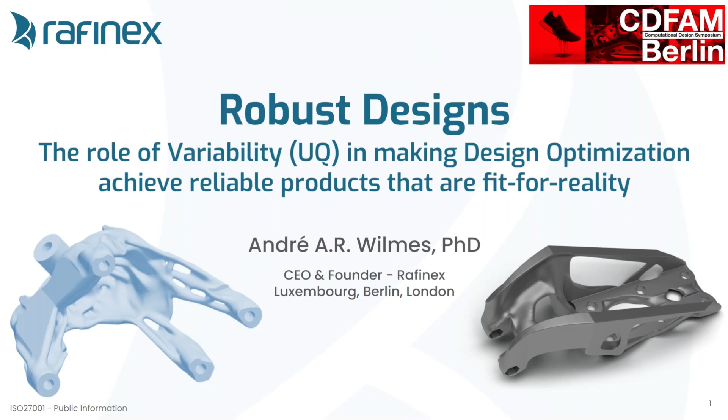This is going to be technology and ideas about robustness, safety, how to get computational designs in the air. Four sections about what I want to talk about. First, who we are. I think we know a fair amount of people in the room, but not everyone quite yet. So just quick words for where we come from. Then I want to touch on the role of risk and money, about computational design in industry, on the field, out there, up in space, and so forth.

A bit about the theory, or at least one take, how we go about it. And then I really want to move as far as possible forward to show past, current, and future design activities that we're involved in to help promote computational design, bring more vehicles into the industry to really be a trailblazer in that sense.

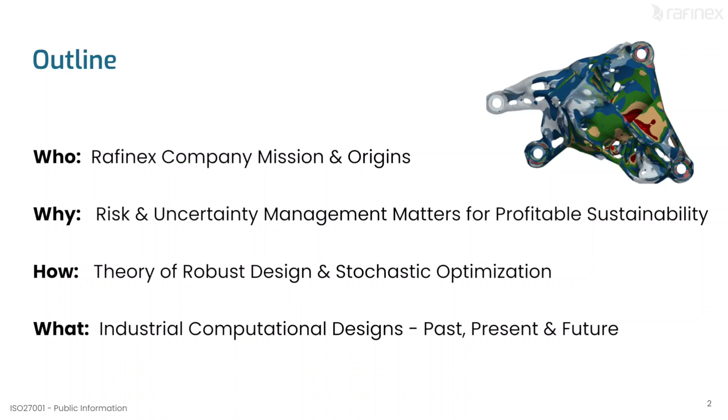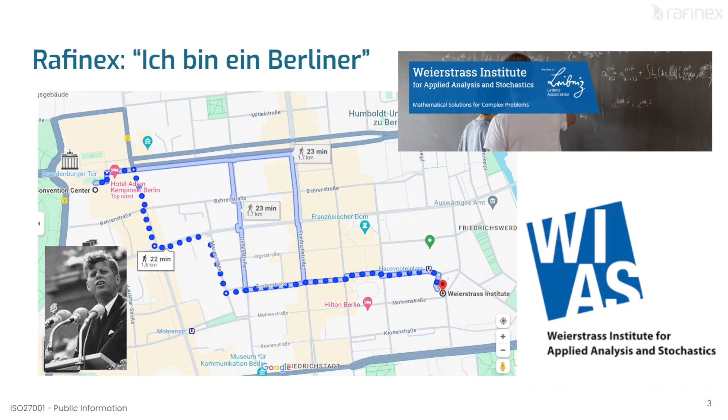So I put this together this morning. So Rafinex is actually a Berliner, so we are formally a spin out of down the road, the Weierstrass Institute for Applied Analysis and Stochastics. So yeah, I thought initially that it was a good historical reference, but then today's macro politics maybe brought us a little bit back to that situation as well.

So why does risk matter, really? We think that risk is integral when business decisions are being made, what designs are being produced. If you don't manage risk within the context of optimization, then you're never really going to have the trust of the business owners or the design owners to commit to optimization. So we really maintain that you have to have that concept of risk and robustness when you go about lightweighting parts, saving money, saving raw materials, saving fuel.

So where does this all come from? People always say good design. I don't need to preach to the converted here that good design is worth it, but just how much is it worth? The life cycle footprint, environmental impact or cost, order of magnitude 70 to 80% of it is fixed during the design phase. So it's well worth spending more time in design because you reap the benefits down the road, but these are just about putting numbers out there to convince the wider audience and not just us.

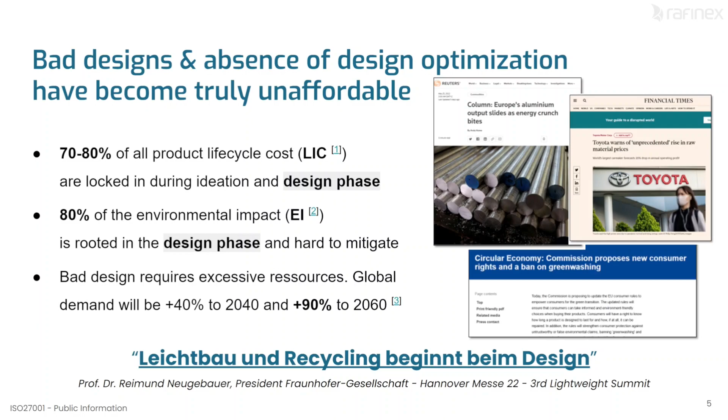And so these are just some references, and design is, I think, critical. Good design is critical in saving materials at a large scale, because otherwise we can't keep up with consumption. So if we really want to align the interests of sustainability with profitability, which is totally doable nowadays, we have to do optimization, do more with less, be more efficient, and so on and so forth.

So the first three points are effectively optimization tradecraft. A whole plethora of words have come across the industry recently as new approaches, but at the end of the day, it's optimization tradecraft. This has been around, so that bothers me. The question is, why isn't it in daily usage? Because optimization is not in daily mainstream usage.

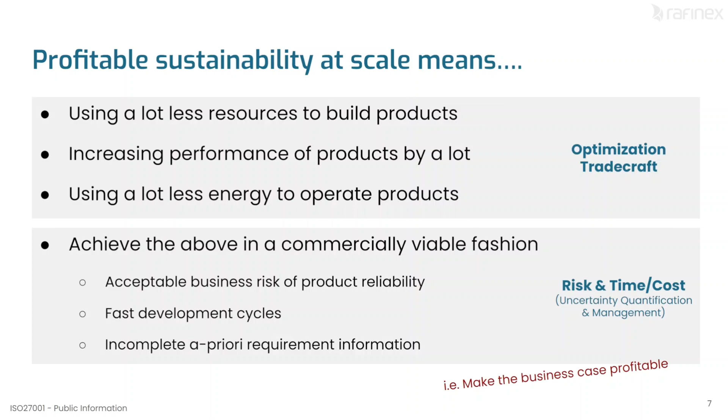Our take on it is that one part of the problem is that the optimization is not fast enough, and it doesn't account for this risk. Like, what's my risk if I optimize? If I really take this much weight out of a design, what's my business risk? Am I going to risk recalls later down the road? Yes or no? No one's ever been fired for buying IBM kind of thinking. So we think that you have to actively address risk to create trust, to then create adoption.

So what's the current solution? Risk, through factors of safety, can be a bit of a conundrum in optimization, because just scaling your loads in all directions and making your designs thicker in all directions based on some scaling factors can be counterintuitive and counterproductive in the context of optimization. You might be spending materials in directions where there is no risk, or you might make your own situation worse during dynamic effects as well.

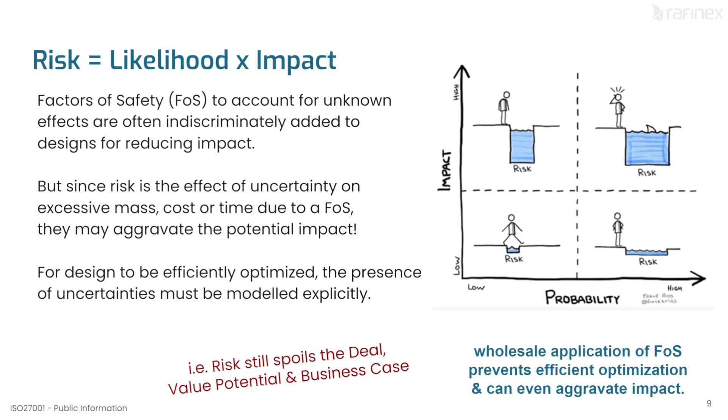So more is not always necessarily better. More in the right locations, yes. More in just about any location, not necessarily. So how do we go about making sure that we get optimal designs which are also robust? This is where our approach is stochastic topology optimization. For those not so familiar, it's this idea of uncertainty quantification merged with PDE and gradient-based search. So here I'll take a short pause.

In terms of terminology, I've spoken to a few people in the room. Really my ask for the whole community, and this is a responsibility shared by us as well, is keep it simple. If there is existing terminology for technologies or approaches, use it. Do not make up new ones, it just confuses everyone. Taxonomy is important. So please just keep your marketing departments at bay sometimes. Sorry.

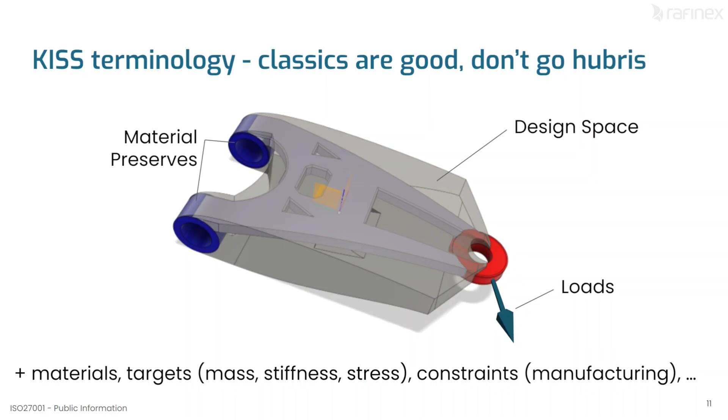Because otherwise we're just destroying value for everyone in the market out there. So I'm sorry I had to take up that fight.

So we are within classical topology optimization, gradient search based and a whole lot. The only thing where we do different is that our initial conditions, input data, particularly the loads and the load angles, instead of being single valued, perfectly known, we can associate a probabilistic distribution on that. You can either estimate it to the best of your abilities, or maybe you've measured it. But you are kind of embracing the fact that your input data isn't fully known.

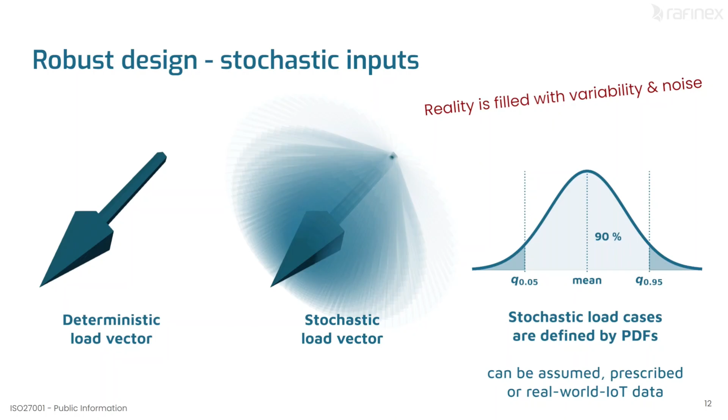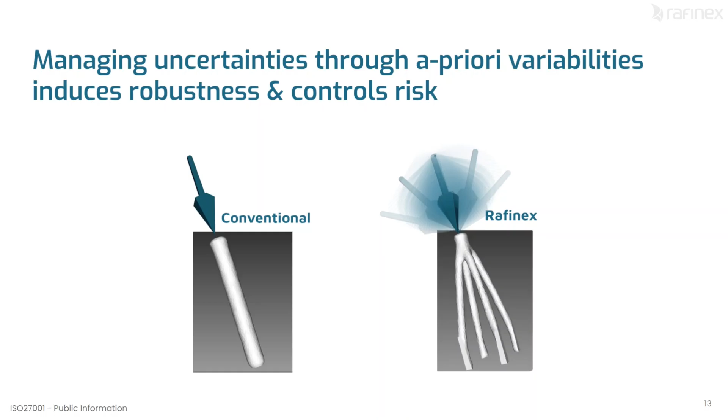And so something really interesting happens. This is a bit of a simplified Lego example, but it gets the point across quite well. Under idealized conditions, you get idealized designs. But the world isn't ideal. So there's a reason the Eiffel Tower has 4 legs, and there's a reason chairs have 4 legs, and there's a reason why a Segway without active control can't stand upright. So that's the idea of robustness. And this is what we're trying to bake into the geometries of the parts that we create.

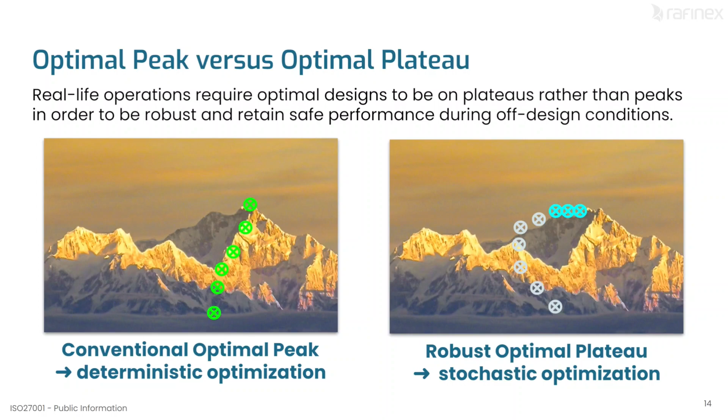In terms of optimization solution space language, effectively what we're chasing is not the highest possible solution point on the surface, but we're actively searching for flat plateaus. So getting designs which have a high performance at nominal values, but should assumptions be wrong, you're moving around on a performance plateau which is fairly flat.

Another technology brick that we use is we are running adaptive meshing during optimization, automated TET4 meshing during optimization, which has a nice effect on the optimization because we get much smoother surfaces, we don't have to geometrically filter. The optimizer doesn't suffer from numerical noise on surfaces and stuff like this. And it allows us also to create, for instance, shell walls during optimization as well. So it's quite a nice Lego brick under the hood, which enables a lot of stuff for us during optimization.

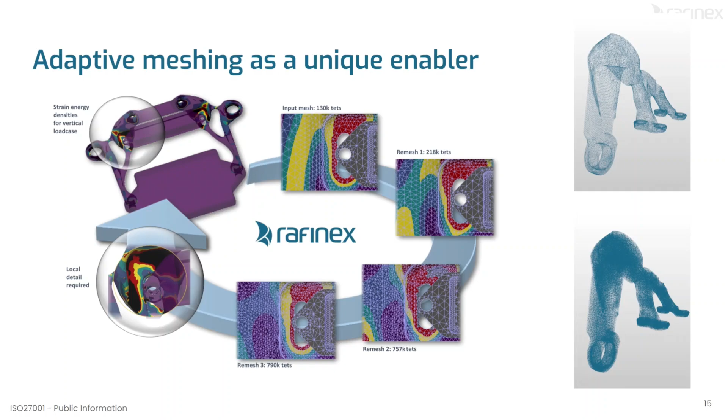Now, again, trying to be a bit pragmatic, what we've seen over the last 6 years since we started: robust designs, we call them in-house ambitious but not totally crazy. So a priori, you don't necessarily know what the design will be, but a posteriori, if you look at them, they make sense. From a mechanical point of view, we often see common shapes. We see stuff that looks like U-channels, we see stuff that looks like I-beams. So as a mechanical engineer, you look at the loads, you look at the design, and you go like, yeah, I understand how this thing does its job.

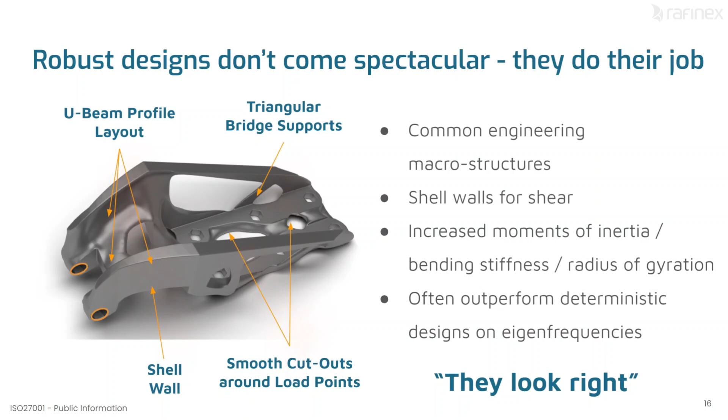And that for us is integral to creating trust into those geometries, and thereby having adoption as well. So it's not about being funky and looking like a coral reef just because you want to look like a coral reef.

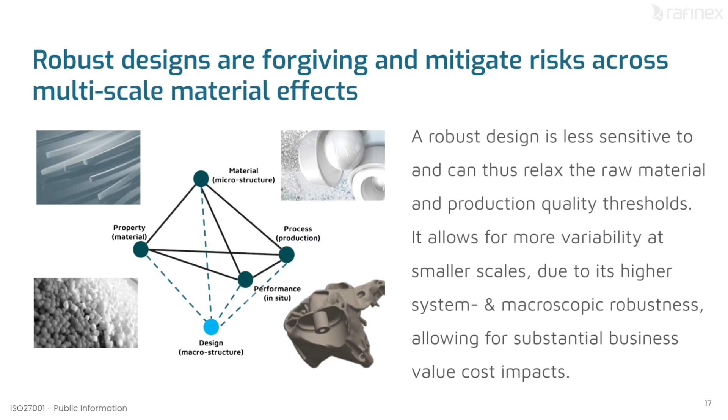Now, again, back to numbers. Our optimization runs in linear elements. That's not a secret. We run on the adaptive meshing, the optimizer finishes, and then we extract the shapes. I've heard some things this morning about disconnected regions and redesigning TO-inspired designs; we try to bypass that as much as we can. We put a lot of effort into the meshing so that the shapes are always well defined, they are watertight and so on. And then we extract that shape, we convert the mesh to a TET10 mesh, and then we do a proper FEA validation.

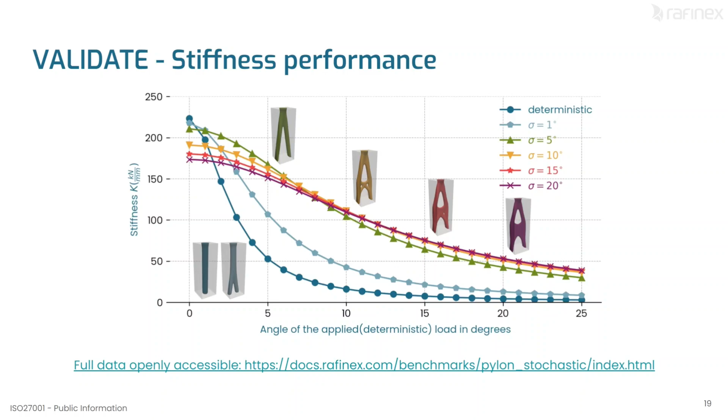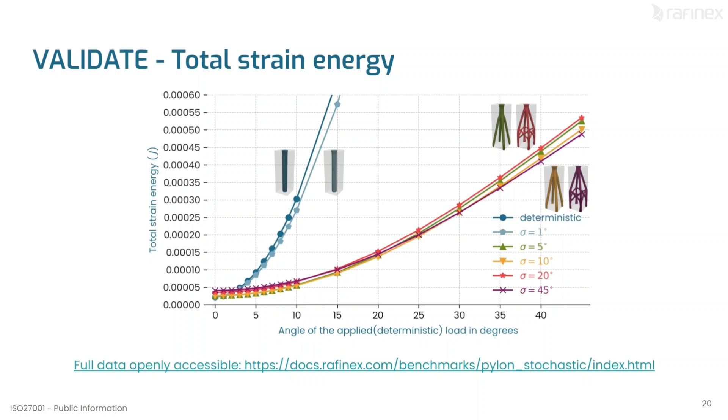So what we can then show, with again simplistic examples, is that designs with increasing variability during optimization have increasingly flat performance plateaus in terms of stiffness, but we can also show it in the strain energy, which is related to the stresses in your body. So these parts have this intrinsic robustness, but please always do FEA validation. Don't judge parts because they look funky or whatever. Do the FEA validation, look at the numbers.

This is something as well that I want to mention: although we can't mathematically guarantee it, there is a good reason why there's a correlation between robustness and higher first eigenfrequencies.

Although we cannot a priori guarantee it, typically we do see that robust designs have good first eigenmode properties, which is good for NVH and other applications.

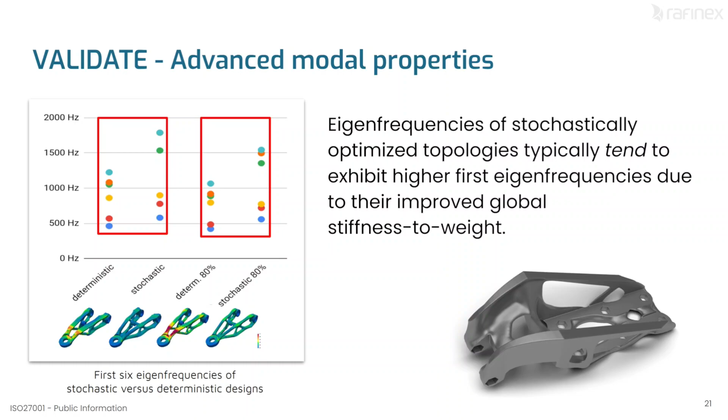Now, I won't dwell on this topic because this is a whole range of itself, but as far as we can tell with our customers, manufacturing constraints are absolutely key. We are talking about designs which are formally robust, which are destined for operations, ergo unit costs matter. Cost matters. So manufacturing constraints is a huge topic at the company. I won't focus on them today, but they are critically key for mainstream adoption.

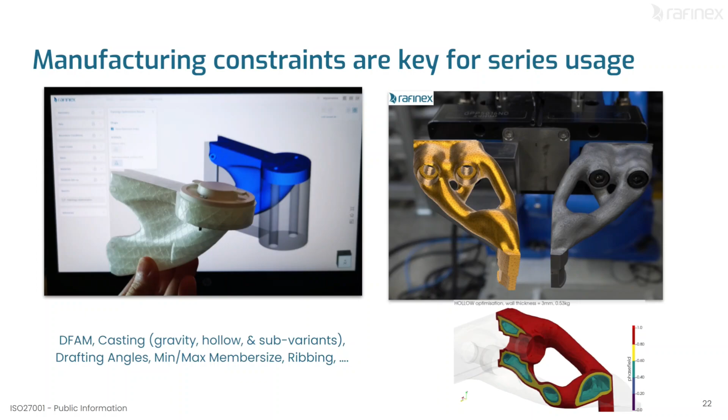And then this is my second big ask today: yes, please, generative design, computational design, judge designs on their validation numbers. Don't pick geometry number 17 just because it looks cool. Please trust the numbers, run the numbers, make fast and informed decisions, which is a slogan that we have in-house as well. The gentleman from Moon Rabbit this morning also mentioned it. It's about generating shapes which are trustworthy fast, doing the FEA validation, and then forming the quantitative basis for people to make fast, informed decisions.

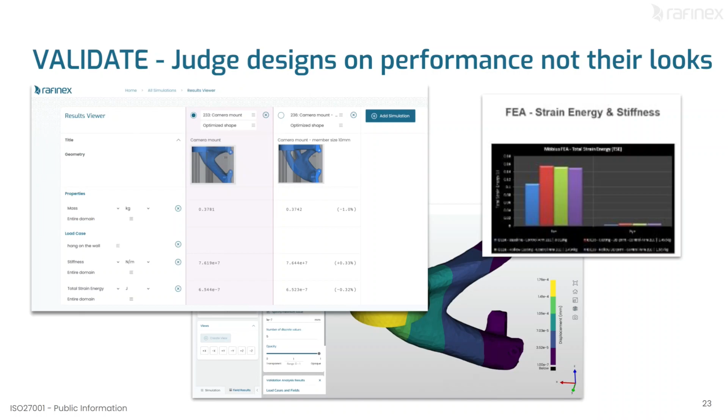We can quantify robustness as well. The same way we can stochastically optimize, we can also stochastically analyze, which means we get outputs of distributions of stress, distributions of deformation. And what we can then do, for instance, in this example, we can show for X percentage of expected operating conditions, we stay below a certain threshold. So if we do robust optimization, we tend to improve on that.

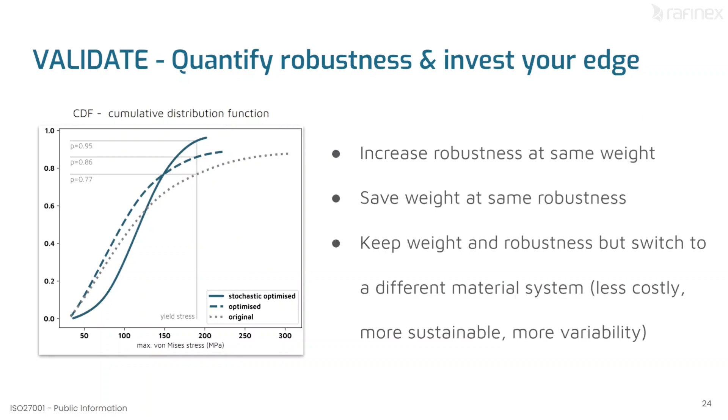And then this robustness budget, you can spend it in several different fashions. One, you can say, thank you very much, for the same mass I got more safety, that's great. Maybe you say, well, my baseline design safety level was okay, please give me material back, because my 77% cutoff was good enough. So in that way, you can trade the robustness budget back for weight. Or, like we saw earlier, you can say, maybe now I downgrade my material to a more recyclable material or a cheaper material. So you get to spend that budget whichever way you want.

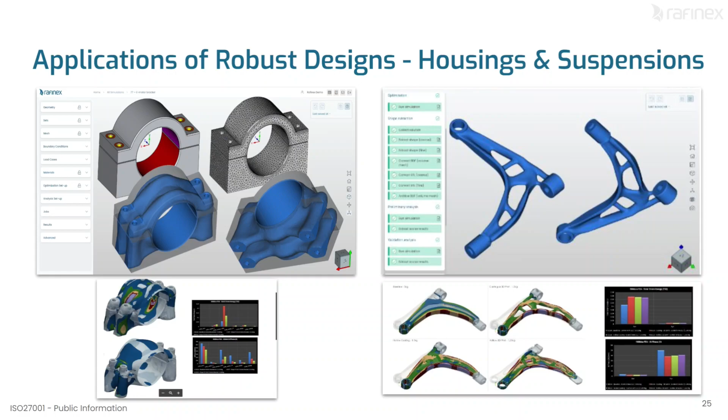Just moving a bit more into geometries. We do two types of optimizations mostly. One is what we call high resolution near final or final designs, really high resolution parts that we try to get as far to the manufacturing state as possible. I'm not saying that we get you immediately finished designs either.

The other one that is also interesting is we can use the stochastic inputs to account not for variability in real life, but uncertainty coming from project management. Day one, your requirements list might be patchy, semi-undefined, or it has holes in it. So you can use the accessibility of having stochastic inputs to at least get going. It gets you over the hurdle of optimizing a first iteration robust design, which is less likely to dramatically change should you update your requirements later on. So we call this fuzzy requirements optimization.

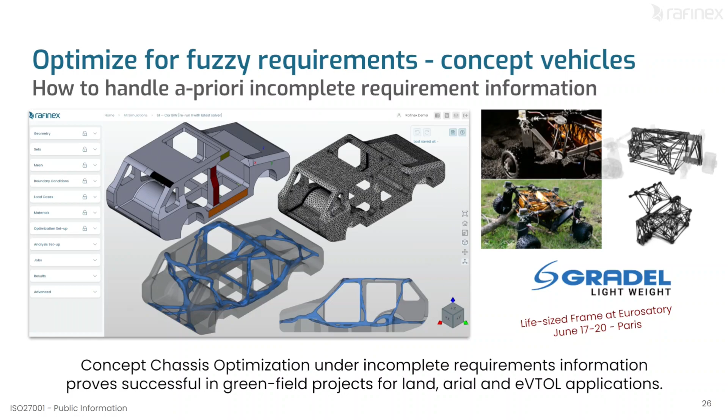For those people coming to Eurosatory in Paris, this is what we are doing for a really funky Luxembourg company that does in-the-air carbon fiber 3D printing, really large. There will be a car-sized inspirational chassis on the stand there as well, so do come by. There are also designs over there, more details over there as well.

So this is a design undertaking we did with DuPont at the time, now Celanese, out of Geneva. They switched an engine mount bracket from metal to plastic injection molding in 2015, 16, 17. And then in late 2022, they approached us and said, well, what could you do about geometry? So we got the freedom to go after the geometry really hard and try to find how much weight we can remove, and also speed up their processes. So, what I mentioned earlier, the ability to go from optimization to validation straight away without having the human re-CAD or redesign in the middle.

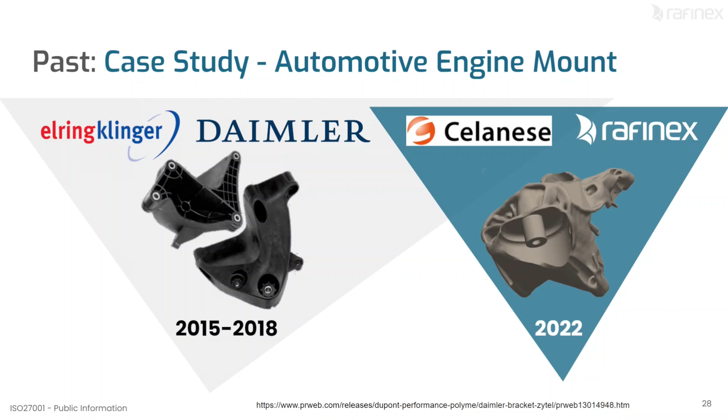This is the gentleman that we worked with at the time, a very, very kind person, so I can only recommend him. He was really interested in how Celanese could potentially quote for parts quicker. How can tier 1s and tier 2s quickly get to a reasonable design without actually having the full requirements, and then do a quote on the basis of that and stay competitive that way? So this was also a bit of the thinking in there.

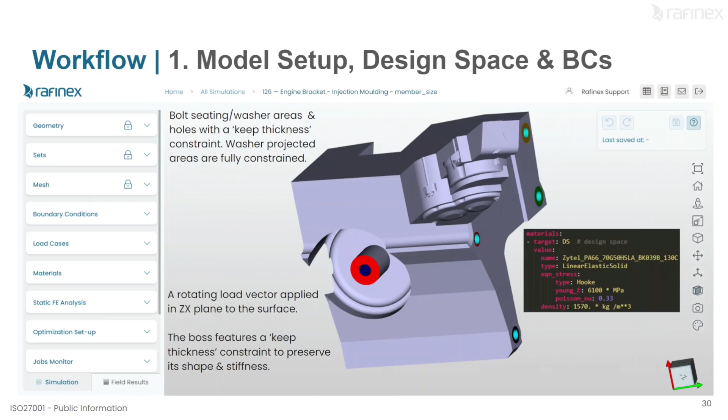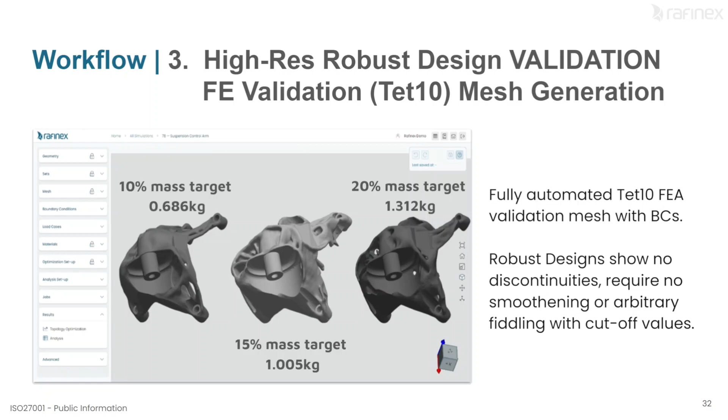So just in terms of workflow, really quick, these are the only pictures of the UI I will show. We start with a design space, typical workflow, we apply boundary conditions. We then do our adaptive meshing with the stochastics. We then jump into FEA validation on the basis of TET10 elements. We can run different variants, so we can kick off different mass volume fractions to get a range of designs. And then on the basis of the FEA results, we can pick whichever winner we prefer.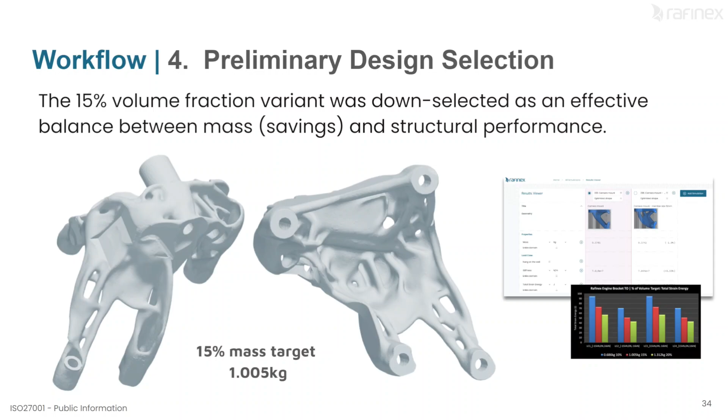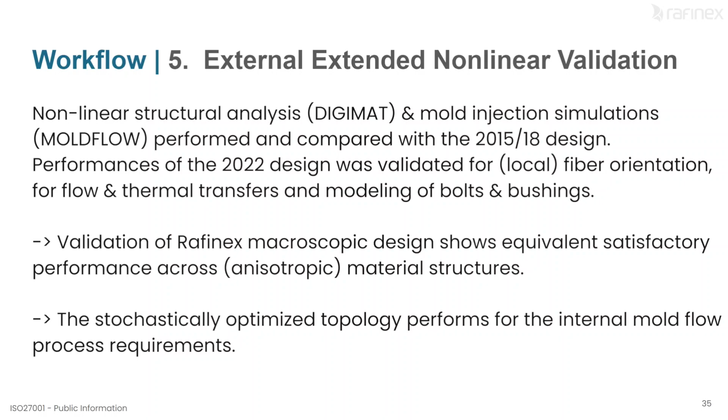And then, so this was effectively the 15% mass target version that was selected. That's also at the back. And then after that, they took this design as well and sent it through Digimat and Moldflow and so on and so forth, and it survived all of the manufacturing tests as well, so that was quite good.

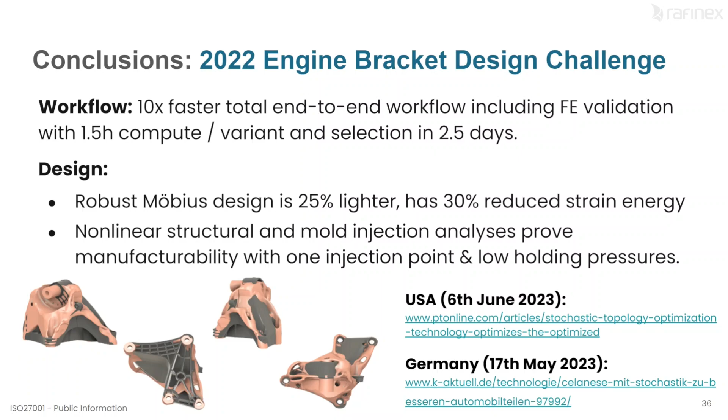So the bottom line, effectively, we managed to shave off about 25% of the weight, get the strain energy down as well by about 30%, and in terms of compute speed, this is still 1.5 million elements, roughly. It runs in about 90 minutes. But the setup to decision time with several variants is now 2.5, 3, maybe 4 days, when before it was order of magnitude 3 weeks. So that goes back to the fast, informed decision making cycle.

So now, compared to last time we met in New York, we've moved on to systems, assemblies, so springs, couplings, being able to optimize really large structures as well. So this is where we really exploit our, people say cloud first, but maybe server first approach is better, because server first still gives you the option of running the servers on-prem or in the public cloud. But let's say server-based approach.

We can create all these asynchronous workflows, so the meshing is being done asynchronously to the optimization. Everything is task-based, and you don't bottleneck the user in the process. You can make sure that your software is adapted to the CPU architecture that you want, and vice versa, which is also very important. And from a business model point of view as well, we are also a SaaS-based business predominantly.

Efficiency cuts into my gross margin. So with this business model, not having a variable pricing component, my developers have every interest in creating efficient code, because I'm spending the money for the server compute. There you go. So those are areas where we're working on now.

Oh yeah, our winglet doesn't look like the one from the Voronoi this morning. So our winglet optimizations go really, really large. We're talking meter-sized objects with a few millimeters in terms of feature size. That is possible because of the efficient coding scalability paired with the adequate hardware under the hood.

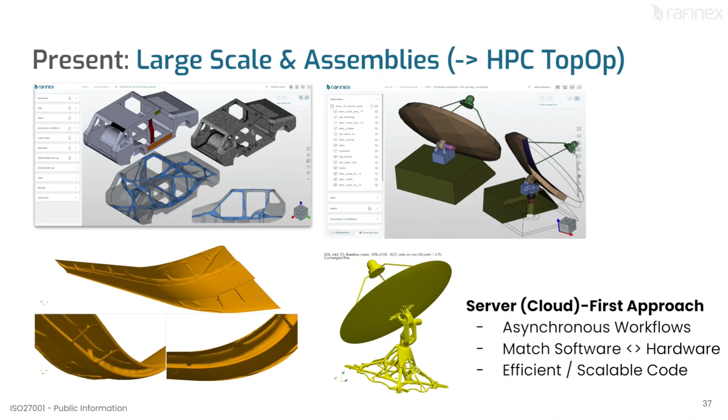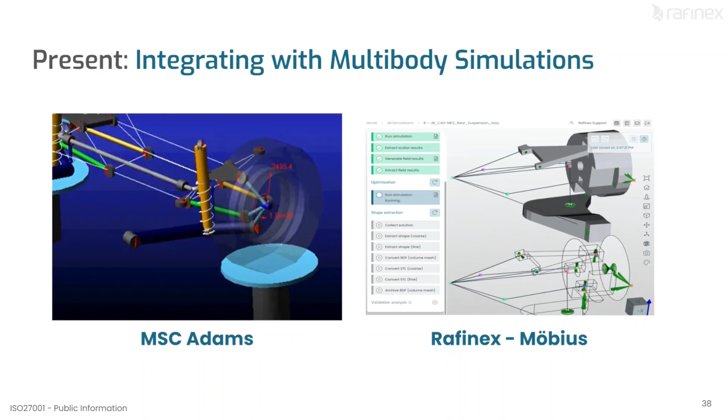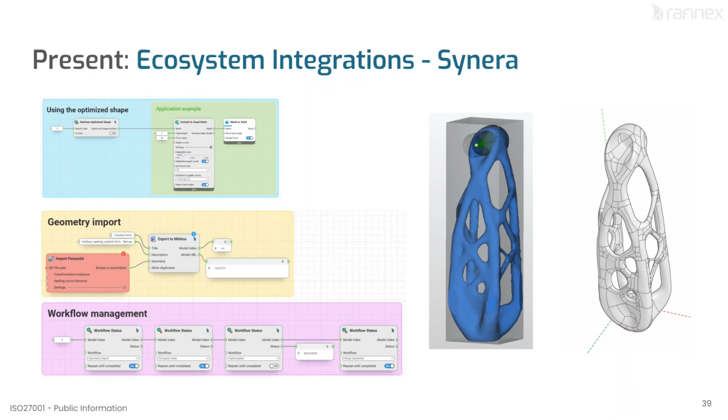Recently as well, and this goes a bit in the direction of Synera now, coupling with the ecosystem, which was also mentioned, I think, by Mr. Lemke. Play nice with others, integrate, provide APIs, create value that way. So now we are able to exchange load data and input data from multi-body systems simulations. Which then actually leads me to Synera, which is not public, but maybe order of magnitude days away. Maybe, we'll see. So yeah, we are now providing APIs into Synera as well, where you can do all this wonderful reconstruction work if you wanted to.

Finally now, upcoming projects, and this is also maybe my third ask of today. I have several projects in the pipeline. I would really ask people who want to design, build, and fly components to approach me. I will try over the next year or two to work together with partners, software partners as well as manufacturers, as well as OEMs and customers in designing actual demonstrator systems, subsystems, vehicles.

So we're talking about drones in the sky, jet parts, unmanned ground vehicles, these things. So I really want to work together with everyone to be able to go, for instance, here and then have a very low Earth orbit satellite stood there in the middle of the design. So showing not just ourselves, but also the wider world, what good computational design looks like, and enticing and growing the community that way.

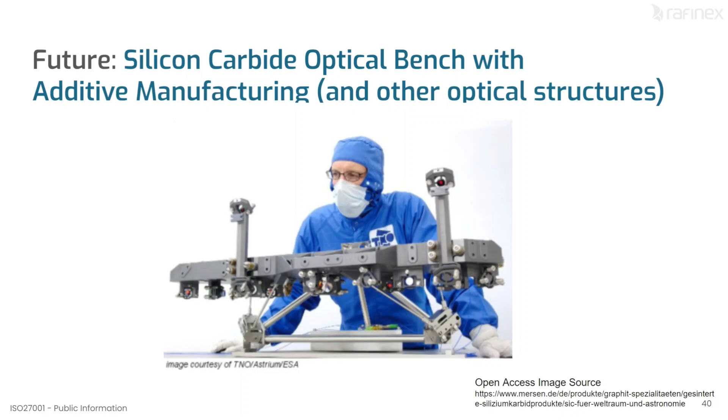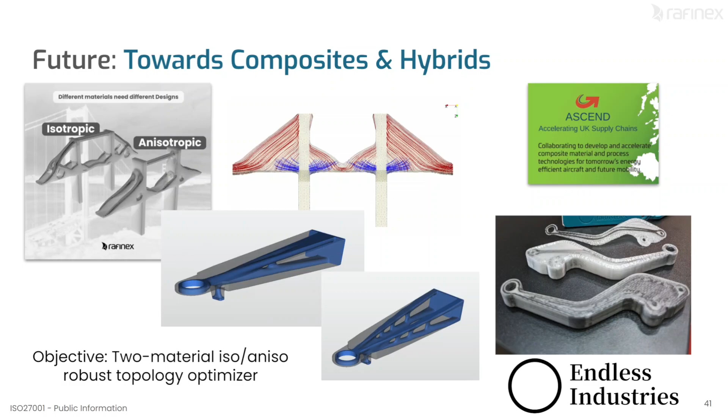So yeah, we work on additive manufacturing for large-scale parts, like meter-sized ceramic additive manufacturing for ultra-stiff optical benches. We are working also on multi-material and anisotropic optimization, so a shout out to the gentleman from Endless Industries for printing what we come up with. So thank you very much for that. So those are also R&D topics currently ongoing.

And then finally, as already mentioned, highly anisotropic topology optimization for really, really funky manufacturing processes. We're working on those as well. Ultralight structures, think satellites, aircraft parts, aircraft interior, those things.

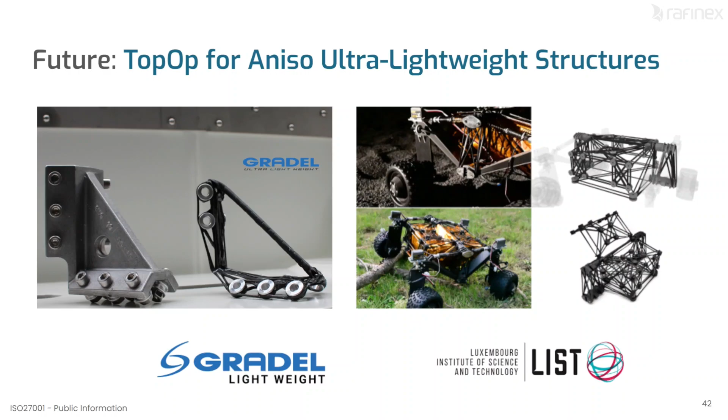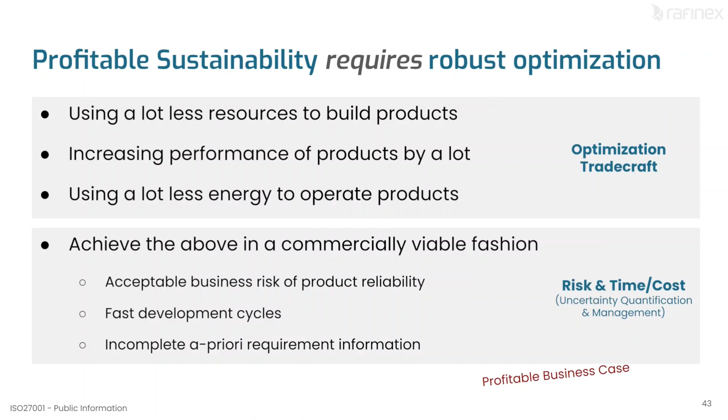So this brings me back to my key message: if we really want computational design to go more mainstream, I hope I made the case for trust, I made the case for robustness. So that's my key takeaway, or I hope that's the key takeaway of today. Because if we don't make it profitable, if we don't show me the money, then optimization is always going to be a fringe operation.